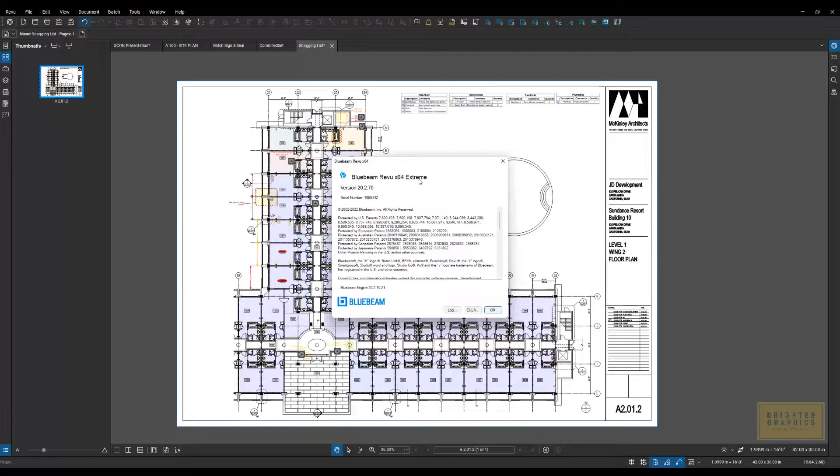So I am running Bluebeam Revu Extreme. You can check on your computer which version you have. It could also say Standard or CAD. Again, these tools that I'm showing you today are only available in the Extreme version.

So I'm going to close out of here, and let's dive into some of these tools and see how quickly I could show you some of them. We're going to walk through a few of them. I'm going to show you the windows and others with the settings and things like that and just talk you through some of those. So let's get moving.

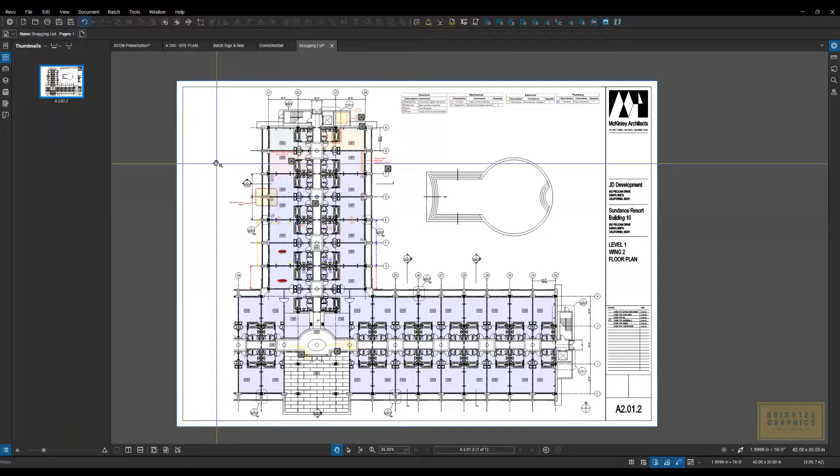First off, I'm going to jump over to a document from XCon. Last week, I taught two courses at Bluebeam's global conference, the Extreme Conference in San Diego. This is my PowerPoint that I had for that course, so I printed it, and you'll notice when I flip through these pages that when you print from PowerPoint, it ends up having some extra padding on the top and bottom of your slides.

So the first tool I want to show you under Batch is our crop and page setup. You click on that, this window is going to open, and I'm just going to have this document here. You can also load as many drawings as you want. So if you have several PowerPoints or drawings or whatever the case might be, you can load those in here using Add. You can add files, the open files that you have open, a set folder full of drawings, or a folder with subfolders.

And you're going to see this in all of our tools today. Just know that you can navigate to the documents you want to work with by going under Add and navigating to those however you choose. So I'm going to just select this one document for now, and I'm going to go to Next.

Our crop and page setup window pops up, and you can see here I have a page setup tab where I can adjust where the content of the PDF falls on that paper, scale it up, scale it down, things like that.

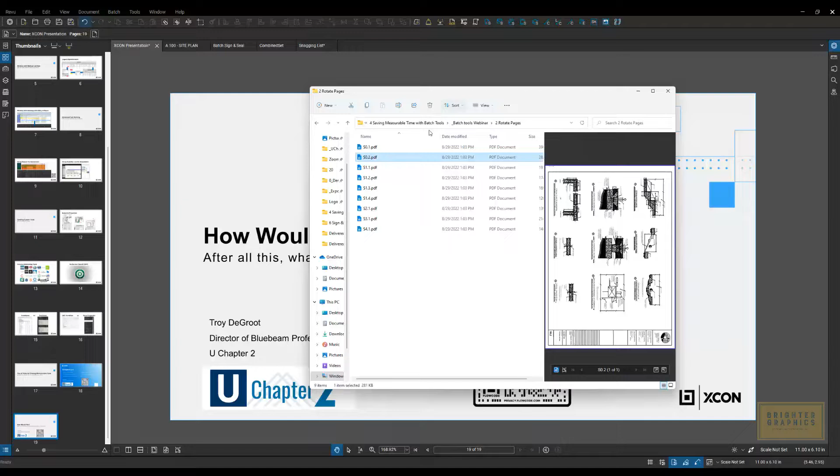So that is our first one. Let's then jump into, I've got a Windows folder open here. Here you can see I have, what do we have here, 8, 10 or so sheets. And it looks like all of these are rotated 90 degrees from whoever printed these. So I'm going to show you how we can rotate those all at the same time rather than opening each one individually and rotating. Again, we're going to go up to batch.

This time we're going to go to rotate pages. I am going to click on this one and remove it. I'm going to go to add, and all of those are in the same folder. So I'm going to select folder, and I'm going to go out to my presentation folder here, and I'm going to go to rotate pages, and all of those documents are in here. It's just telling me that I'm in that folder. So I'm going to say select folder. It's going to bring in each of those documents separately, and then I can tell it to rotate.

This time I'm going to say counterclockwise 90 degrees, and I'm going to say OK. It's going to say you are about to save changes to multiple files. Do you wish to continue? Yes, that's exactly what I was hoping to do. Click OK, and let me bring that window back up. And now you can see inside of that folder, all of those have been rotated and saved without even opening them. So that's the power of some of these batch tools. We can manipulate multiple drawings or documents at the same time without even opening them.

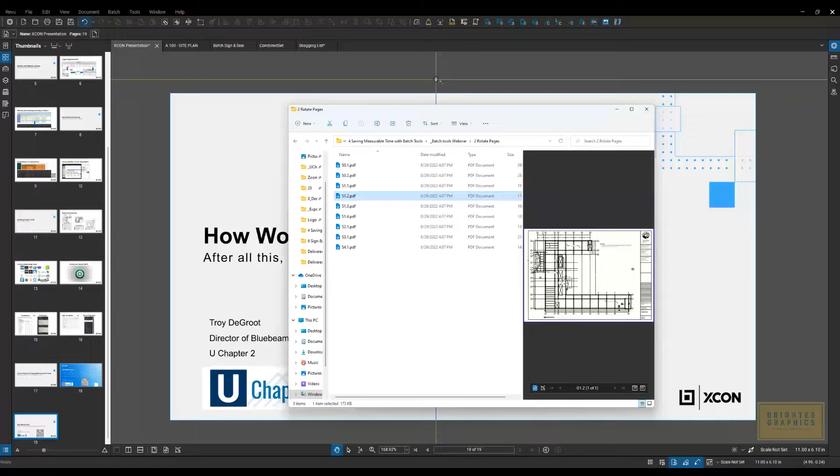Okay, so what's the next one here? Split documents. So if I go to this document, you can see it has close to 40 different pages, and it might be too large to email. We might want to shrink these up or package them in different sections. So the next one I'm going to show you is split docs.

So I'm going to go batch, split documents, and this window will pop up, and I'm just going to introduce some of this to you. Our options down here, we're able to split by page count. So if you want there to be 5 pages in each package, you can do that here. Or if you're concerned about email possibly, and you want to limit the file size, you can come in here and tell it how many megabytes you want per file. And then what it's going to do, you can also make sure that you have the update hyperlinks to relative paths checked so that those hyperlinks to section cuts and things don't get broken.

They still work. Include layers. You can tell it the destination folder in here. And then down here, you can select a prefix or a suffix. So do you want it to say part 1, part 2, and then the document, or do you want it to say that at the end? So the document name part 1, 2, 3, whatever that case might be. Here you can see the pound character indicates the number position.

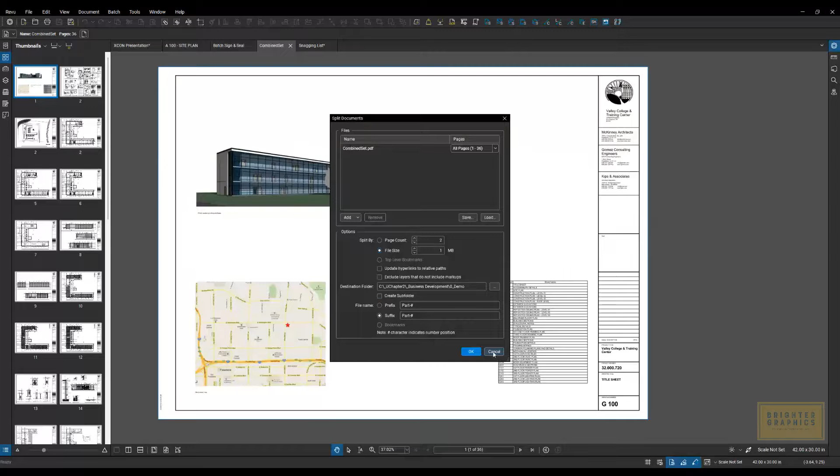Okay, so you can come in here and break up documents into groups or manageable sets to be able to send those apart or send those in an email. So I'm going to cancel that one. The next one, I'm going to jump back and let's jump back to my presentation here.

On this presentation, I don't have any page numbers or anything like that. This could be a bid document, spec, drawing, anything like that where you want to add a header or a footer.

So I'm going to come in here, batch headers and footers. I'm just going to select the file that I have open. Again, the purpose of the batch tools is we could have multiple files open at the same time from different folders all over your network without opening those. I'm just going to point to this one and show you how this works. So I'm going to say next.

And it gives you this header and footer preview screen. On here I could go down, maybe in the header on the left, I want to add the date or page number. So I don't have any page numbers on here, I'm going to add that up here. Page number - I can tell it what format I want to see it in, so I'm going to say 1 of n.

So it'll say 1 of 19, and I want to start at 1. Say OK - that gives me a little preview of what that's going to look like.

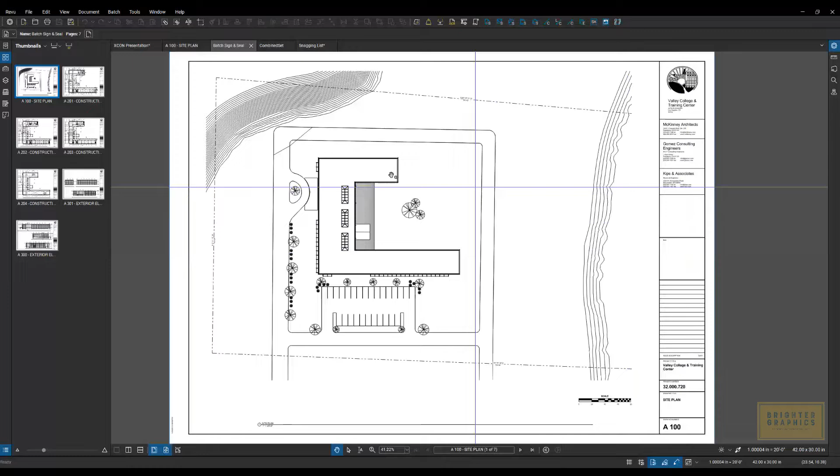So in this case, again, I just have several drawings in the same file. I'm going to come back to my batch sign and seal, and I'm going to select all the pages in here. So on here, I'm going to go in and add my digital signature.

Checking that box, I'm going to go and actually sign in. See if that works. And you can see it brought in my signature here. I'm actually going to leave that on there.

I can put a reason in here - I agree to the terms, I am approving this document, things like that. And then I can also add the date and my seal.

So down here on my seal, I can have it import my signature, or my signature with my seal. I'd have to double check, where I'm just going to use that one. Are you sure you want to overwrite the existing stamp? I'm going to say yes.

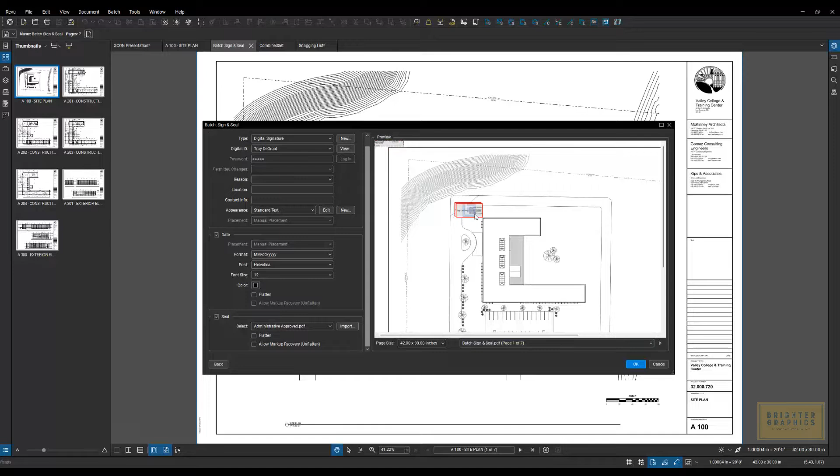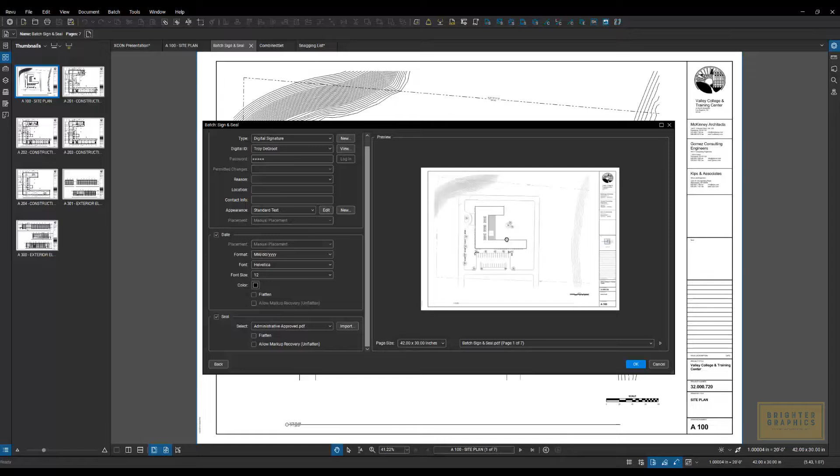And then I can go ahead and move this where I want it. So I'm going to just drag that, drag my date as well, and drag my signature. I'm going to have to zoom in a little bit. And I'm just going to move all my parts over here - sorry, I'm jumping around - put this into that section along with the date. And where did my signature go?

Once I get this all placed in the right place, I'm going to click OK, and it's going to embed that on all of the sheets in this document, all the sheets that my signature's pointed to, and it's going to flatten the document so it's ready to send out certified and signed. So that is our batch sign and seal.

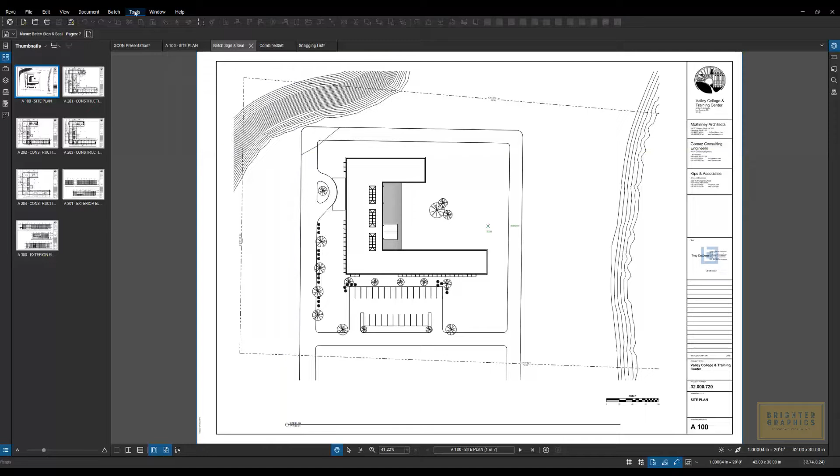Next, looks like I skipped over one. I'm going to jump there quick: batch security. Looking at the settings, we have an opportunity to require a password to open the document. You can put in a password and verify it, and set different security levels on documents, requiring a password to print, copy, or edit, and so on. You can see the different settings in there for security.

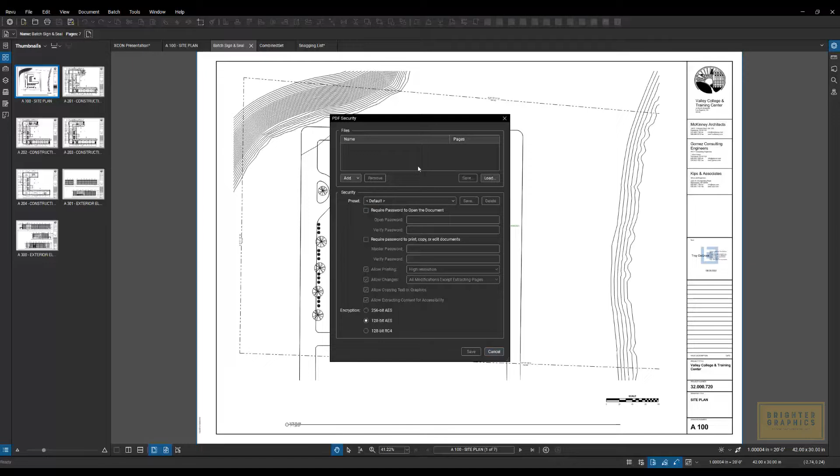In a batch capacity, again, you would load as many drawings as you want at the same time without even opening them. Cancel here, go back, and the next one we were on was apply stamp.

In a lot of scenarios, when you're in a document that has several pages, you can always apply a stamp to several pages. Apply to all pages is a right-click option.

Here, we're able to point to several documents again without opening them, and position and tell it what stamp, where we want that, using the XY coordinates, we can tell it where to put that stamp, where the anchor corner is. So from the upper left corner, this particular one I have set up to go 5.7 inches to the right and 7.5 inches down. This is just a way to apply a stamp, whether it's a preliminary or a not for construction stamp, anything like that, to several documents at the same time.

So I'm going to close that.

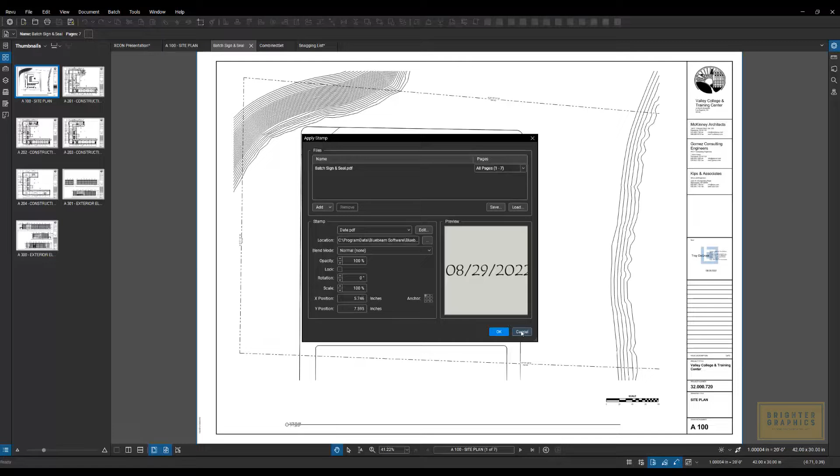And I'm going to jump into the combined set here. Again, this is the same document. We have almost 40 sheets in here. This is one of the most popular features in the batch tools, and it's called batch hyperlink.

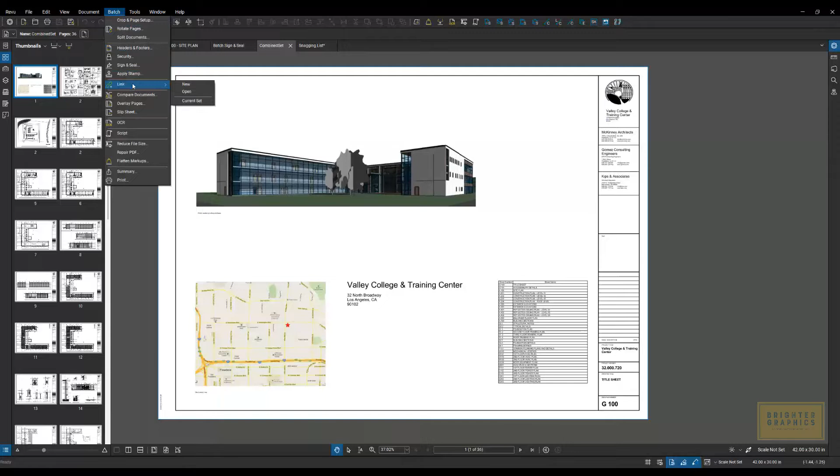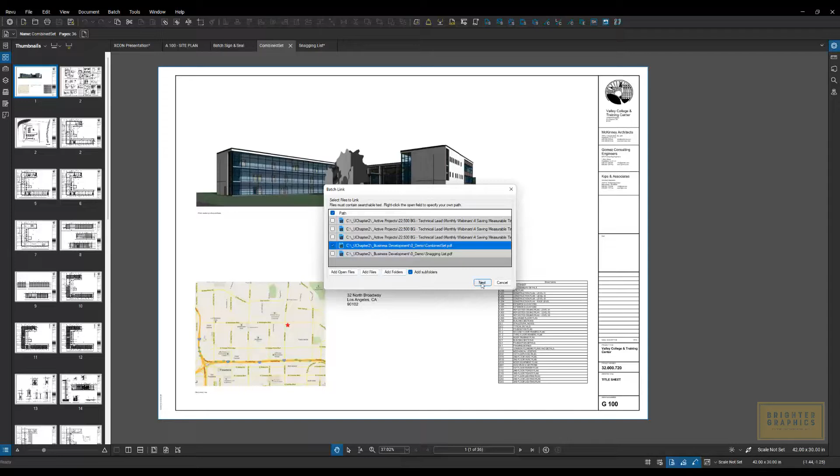So if I come up here again, batch link, I can click on new, and I'm just going to select open files. I don't want that one. This should be the one I want. Actually, it's this one, sorry. Again, you can add files and folders. I'm going to show how to do this within one document. I'm going to say next.

With this one, I am going to select a page region. Click on here, I'm going to go down and draw a box around this G100. And I'm going to say OK. Over here, I'm going to click on generate, and it's going to create this list. So what this list means is that every time Bluebeam finds G101, it's going to create a hyperlink going to page 2.

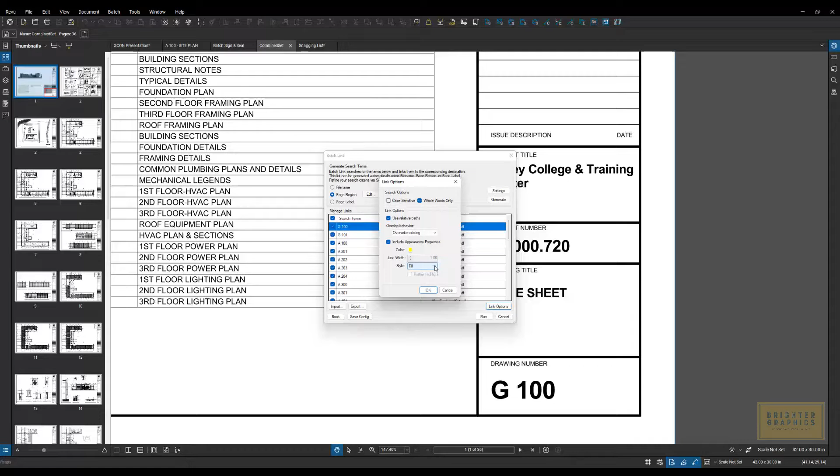So now we can go in and click on run. Let's take a look at the link options first. I like to include the appearance properties and select a yellow fill style, and that will make sure I can see all of the hyperlinks because they'll be highlighted yellow. I'm going to say OK here, click run, and you can see what that looks like. It's going to go through in just a couple seconds. It's looking for all of those sheet names in all of those sheets, and it's created 129 hyperlinks that quick.

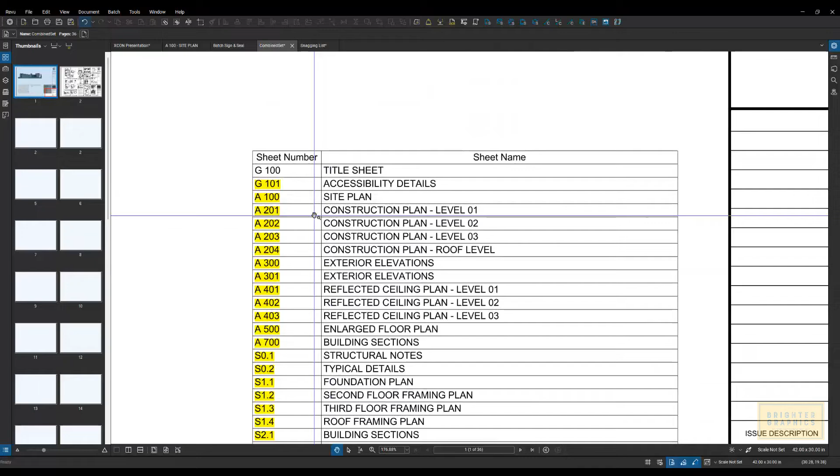I'm going to click on finish and close, and now you can see my sheet index is active, and I can go look at level 1. I can click on the stair blow up, I can look at the stair section. It's just a really nice way of navigating through those drawings, drilling down from the plans through the elevations, building sections, and details.

So that is our batch hyperlink.

Next one I'm going to run through is batch compare documents. In here, I want to select the current file, so I'm going to grab onto a folder and go into my compare documents. I just called this one current drawing, that's where all the current drawings are, the full set. I'm going to say select.

And then on this one, the revised files, I am going to point to a folder here, same project, going to select revision 2. And it pulls in those drawings that were affected here.

Now I'm going to click on Match Pages. It's going to recognize how these are named and match those up for me. And then all the unmatched are ones that don't have a revision file. So this worked just the way we wanted to. It found the ones that matched and lined them up together.

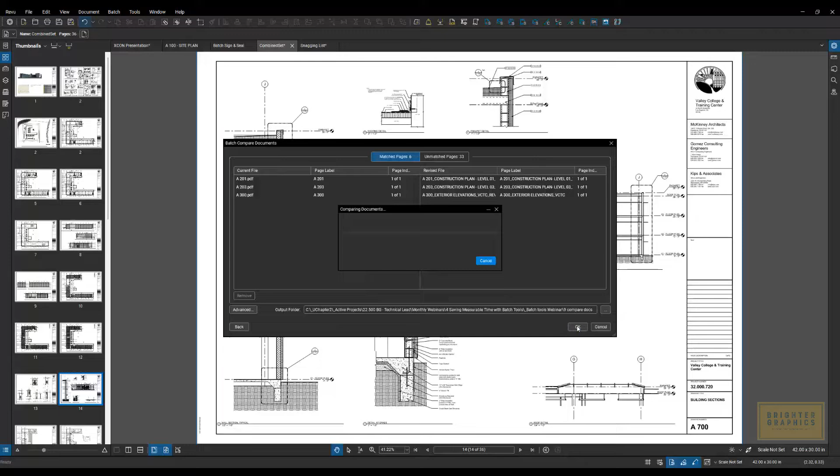So it ran those. I'm going to just say OK here. I don't need to do that report. And let's go back to our folder and open that up.

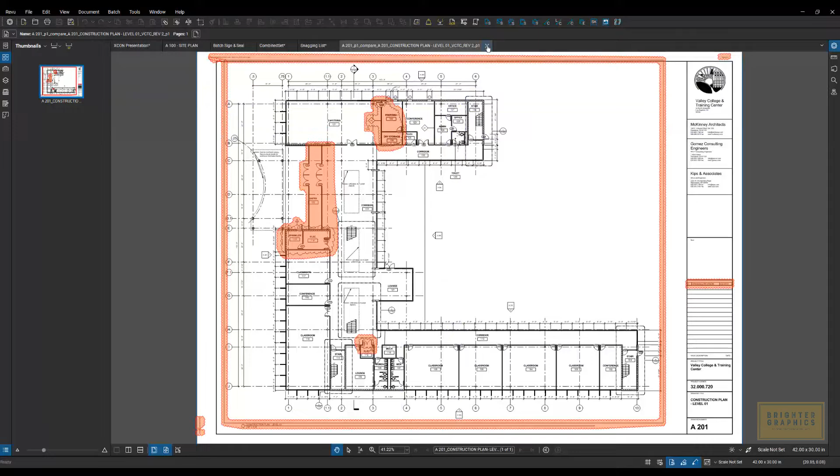Into our compare documents. Here you can see in the preview, I'll open up one of these. It ran it on each of those. Here you can see it put a cloud around all the areas that were different between the two drawings. So if we opened those up, the original and the revised, you would see that this wall moved over, they rearranged this room here and added this one. So it's finding the differences in those drawings in a batch capacity and clouding those for us. Really cool tool there.

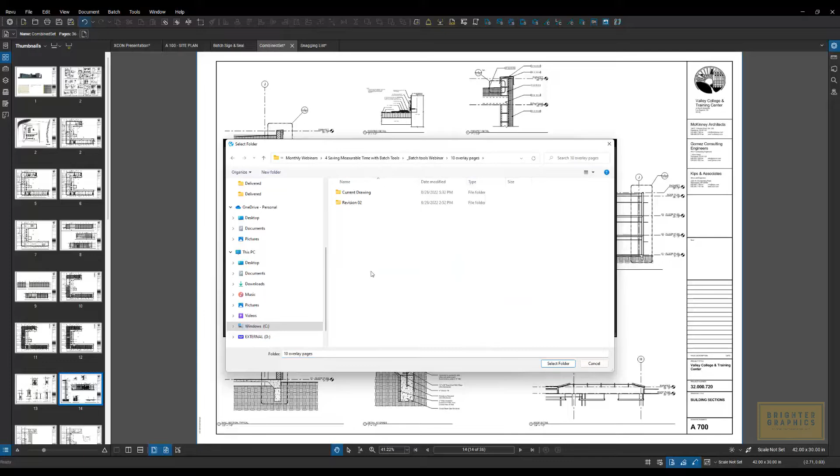The next one we'll show is our batch overlay. If you're not familiar with the overlay, let's just do the same folders real quick. The original's up there, and the revision 2. Match those again. They found each other and made sure that they matched up. This time I'm going to go to my overlay pages folder and say OK. And that's going to run.

It's going to ask me if I want to put a report in there again. Just for documenting purposes, when revisions come through, it might be a good idea to run a detailed report and put that in that comparison folder. I'm just going to cancel that.

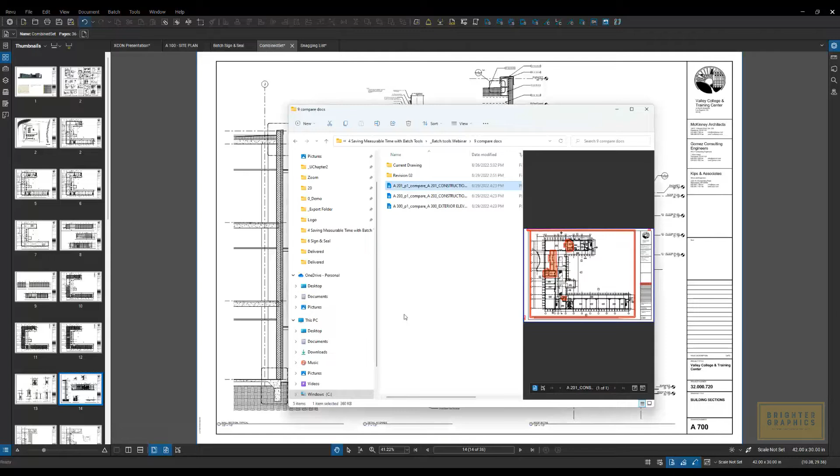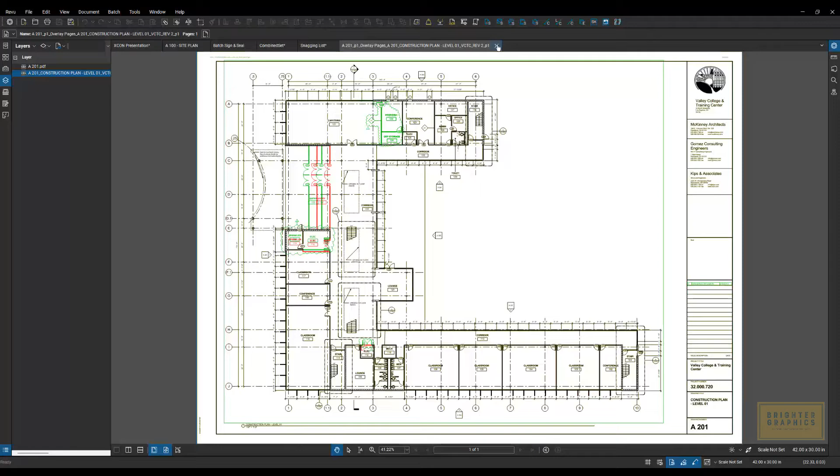Jump out to my folder again, to my overlay pages. And here I'm just going to open up one of them, and you can see what's different between those drawings. So it puts those on top of each other, just like an old light table, shows you the differences. If you go to the Layers tab, you can turn each version on and off, so you can see what's on this one and what's on that one, and how they correlate with each other, overlaid on top of each other. That is our batch overlay pages.

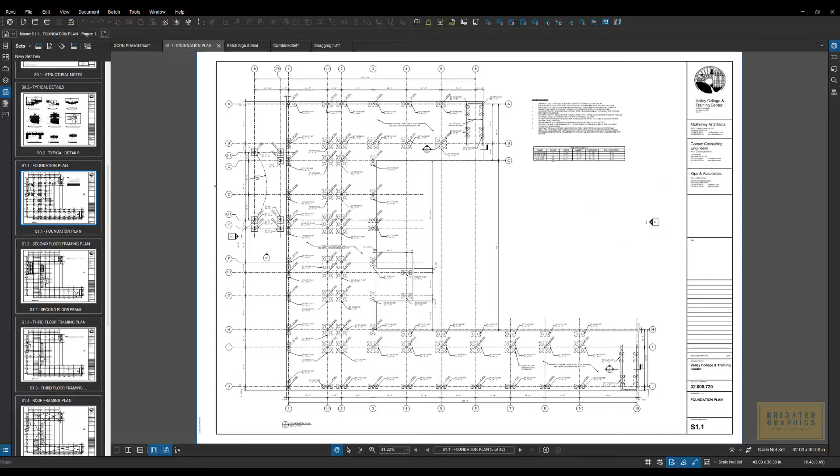Next, we're going to go into Slipsheet. This one's another popular one. If I go into my sets, you can see that I have built a set of individual documents. These are all individual pages, pulling from a folder so that we're looking at a set. When I click on these, it'll open up an individual sheet and allow me to not have the document that's 40 pages open, but only one at a time. So it opens it up so other people can work on this as well. In this one, you can see this is all my current set.

And with Slipsheet, we can actually start stacking in our revisions. So I'm going to come in here to Batch Slipsheet. My open set is my current drawings, and my revised file, I'm going to come out and point to the folder, Slipsheet Revision 2, select. It's going to bring in all of the sheets that were affected by that revision, and I'm going to click on Match Pages again.

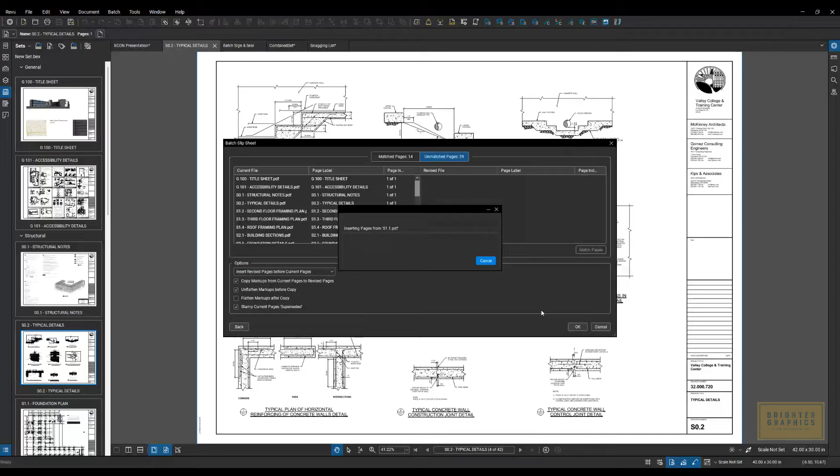So I'm going to click OK here, and you're going to see those slide in. And the new one is always going to be on top. I can create a report on this also. Click OK there. But you can see here on this structural S.1 sheet, you have the current sheet and you have the superseded sheet. So you can always go back and look at previous versions, but your most current one is always going to be on top.

So that is our slip sheet. And then as far as user functionality goes, all your users would open up this set file and have access to this set instead of opening up the individual drawings. That way everybody's looking at the most current set at the same time.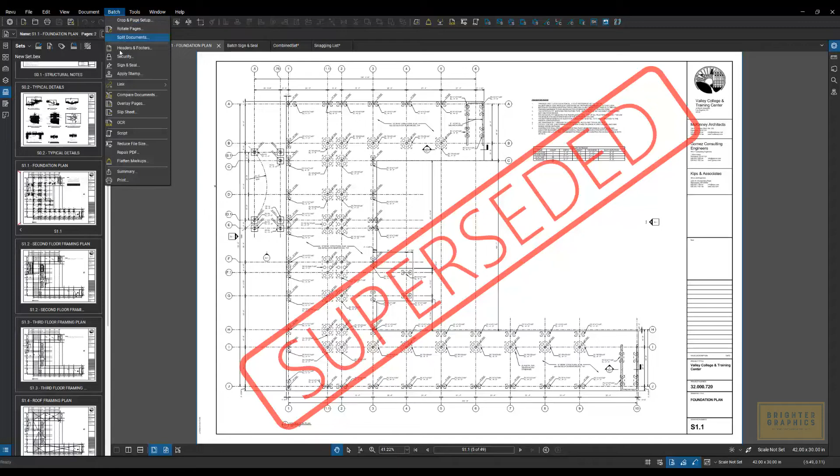Next one is OCR. I've got to speed up a little bit with our time constraints. When you come in here, it's going to allow you to select your drawings, folders full of drawings, whatever the case might be.

Set the language, set what type of drawing or document it is - is it text, CAD, whatever the case might be. Do you want to correct the skew? Is the drawing scanned and turned slightly on the sheet? You can fix that. Detect orientation, detect text and pictures, and so on. You can also skip vector pages because those are already optimized. Click OK, and it's going to run through and fix a lot of these issues we have with raster-based drawings.

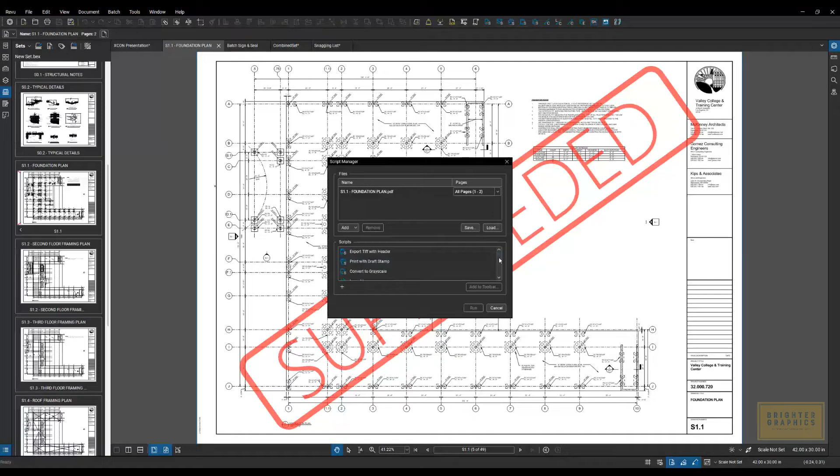Cancel that. Next one we go to is script. I discussed this a little bit earlier, but you can build scripts in here. This one's kind of cool - it's 4 different steps built into a tool. If I select this and go to edit, it'll help you build these scripts with color processing.

So I'm changing everything to black, I'm going to stamp it with this stamp and this is where I want it to sit, I want to flatten, and I want to split pages. It's going to do all of that with one button, running through all of those scripts. So lots of time savings there as well.

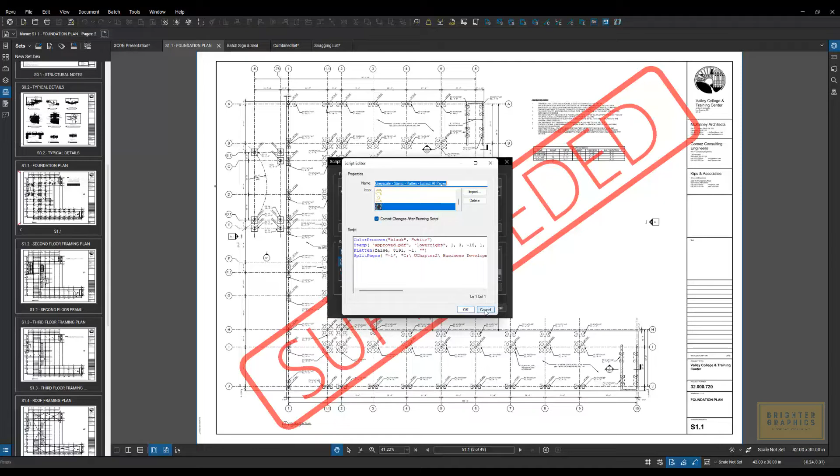Cancel that. I'm going to jump in here and show you reduce file size. This is another one where you can look at the different settings. Load as many documents as you want. You can set the quality dial as high or low as you want.

But what I want to show you here is the edit custom presets. When I come in here, it'll allow us to pinpoint what we're looking to reduce or where we're allowing things to be reduced. So here we've got images, we can go through and change settings there. If we go to fonts, we can look at things there. Miscellaneous - if you're not worried about some of the metadata, uncheck that or check it so that it purges some of that information, and so on. So you can pinpoint exactly what you're okay with reducing or getting rid of so your file size changes.

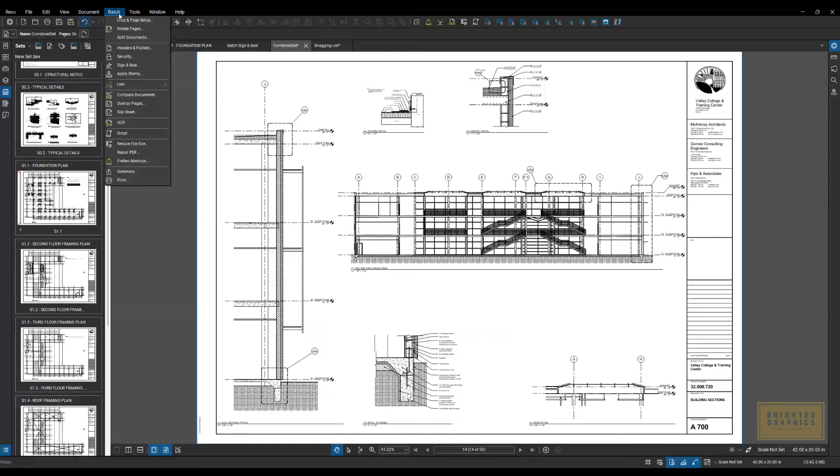Close that one. Let's see, repair. Next one is repair PDF. Again, different things you can select in here, loading all your drawings, remove text clipping, repair fonts, all of these processing wipeouts - that's a big one coming from AutoCAD. Things like that, we want to be able to fix those. So this is where you would repair your PDFs.

Next we're going to jump down to flatten. We're getting there, running out of time. Under the flatten markups window, here you can see all the different things you can pick and choose what you want to flatten - doesn't have to be everything. The things I want to point out here in this window is you can exclude filtered markups, only do currently selected markups, things like that.

But the one to be careful of here is allow markup recovery, or unflatten. You can check this box and be able to unflatten things, make adjustments, and flatten them again. Just be aware that if the user on the other end you're sending this to is aware of this checkbox, they might be able to unflatten them as well. So a lot of people flatten things so people can't manipulate them - just know if they know about this check mark, they might be able to go in and unflatten your markups.

Okay, this one's kind of cool too. If you show properties in pop-ups, you can actually flatten things and still have the subject, the author, and the date pop up when you hover over those markups, even though they're flattened. So this is kind of a neat way of having the metadata in your markup without leaving the entire markup available to be manipulated - just show them the metadata as they hover over that information.

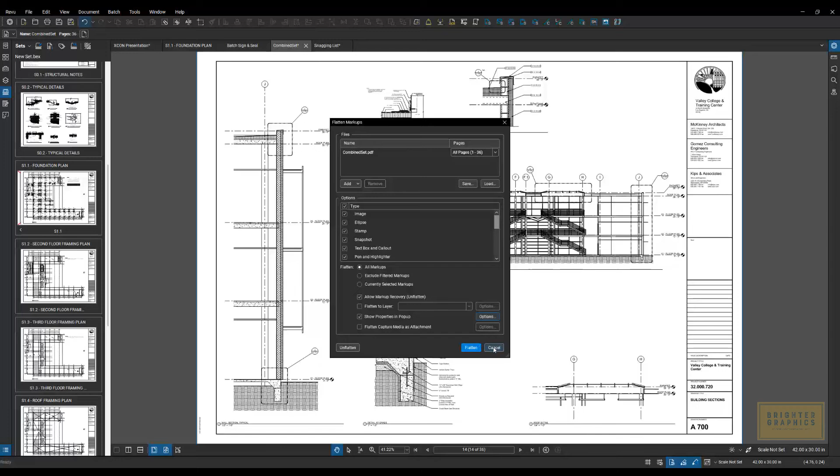Next, I'm going to jump into my snagging list drawing example and show you the markups list. Here are all the markups that I have for all the different disciplines, structural, electrical, mechanical, that I found walking through and placing symbols, things that I found that were wrong or needed to be fixed.

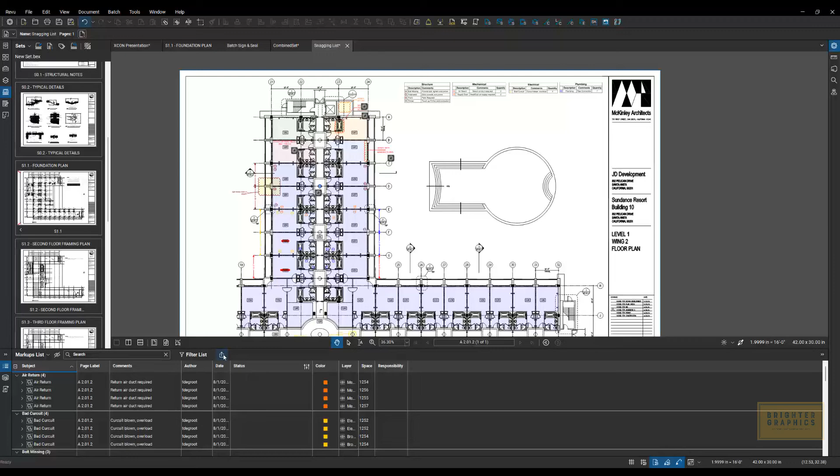And then you can, of course, create a summary up here. Do a PDF summary, and in here you can select what data you want included in that summary. You can filter and sort. So maybe I want to only show the mechanical. Down here, since I added layers to everything, I might select only mechanical, so only the mechanical markups will show up in my summary.

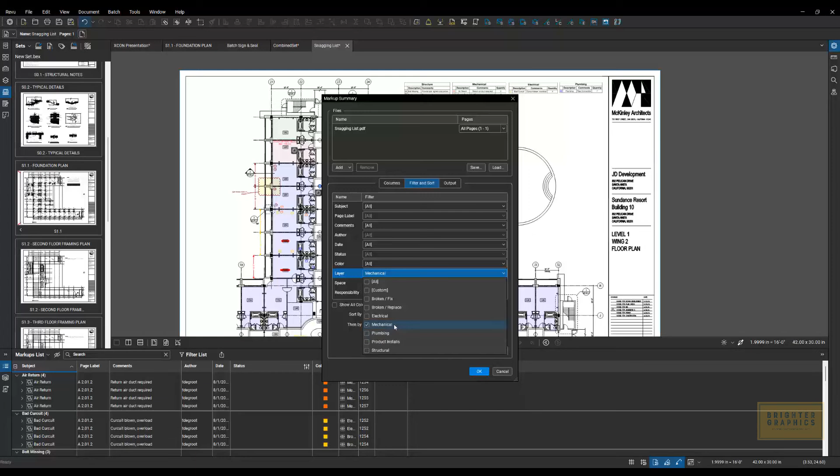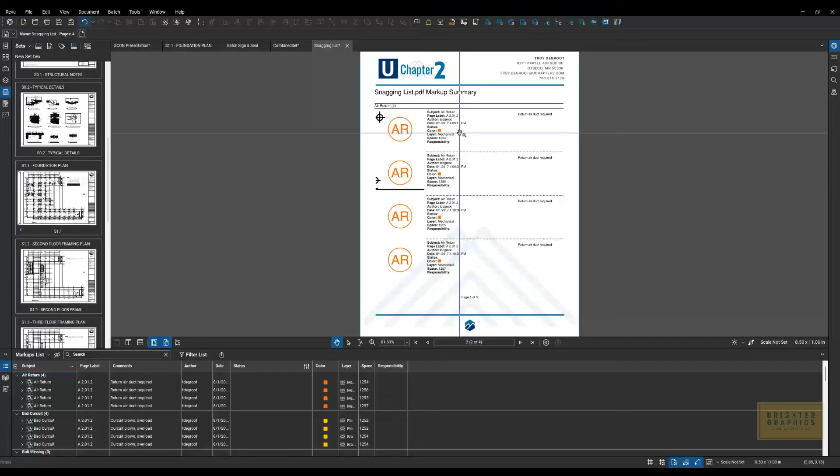And then when I go to the output, I can tell it to go to my letterhead as well. I'll go in here and just say OK and show you what that summary looks like. It's going to show a preview of all the different markups and all of the data associated with that markup, and it all landed on my letterhead.

So there you can see the different summaries. And if we go under our batch summary, you'll see it's all the same setup and functionality here, except we can point to several documents at the same time. So if you have a whole folder full of markups and you want to run a report so you can send it to your drafting team, indicating who's in charge of what, revisions and things like that, you can do that here, just loading up all those drawings.

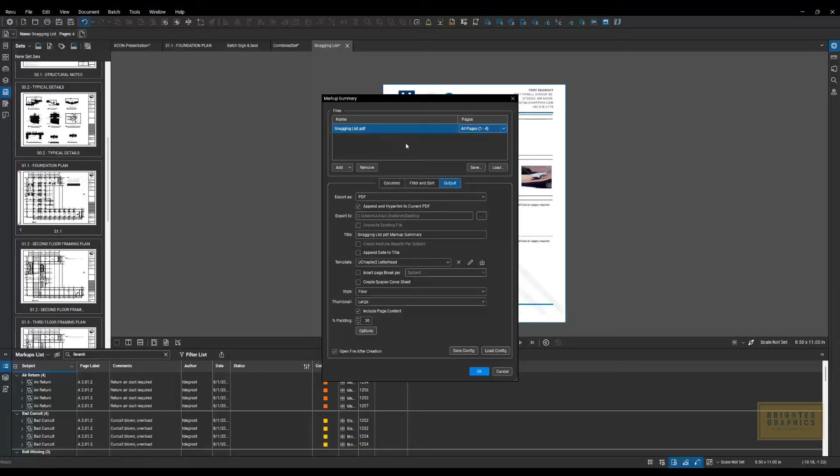I'm going to cancel this one, and then we'll jump into the last one, which is batch print. Very similar to the summary, you can go in and load several documents, whatever those might be, different projects, different phases, all in different folders. You can load all of those just like the other tools, and then come in here. Maybe you just want to combine them all into one PDF. You can select your Bluebeam PDF, print it to a new PDF, or select whatever printer you might have in your office if you're printing to a paper document. So that is our batch print.

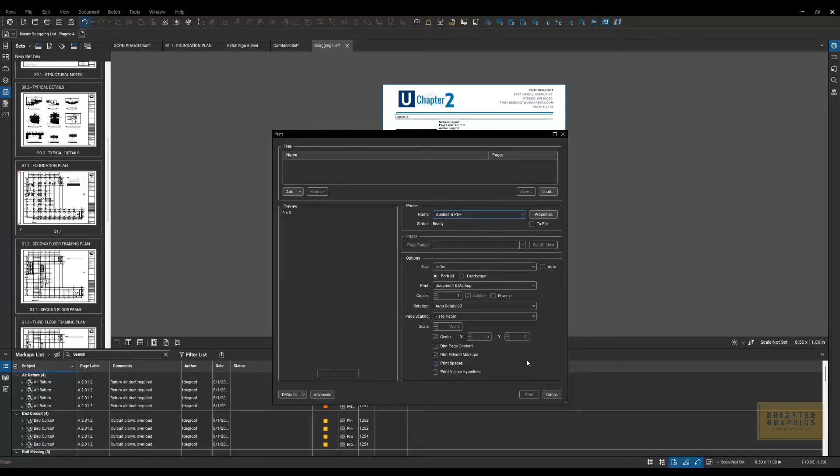Well, there you have it. How's that for tools that save you time on tedious tasks? That was another fun presentation again this month. I hope you all took notes and enjoyed the detailed introduction to Revu's batch tools.

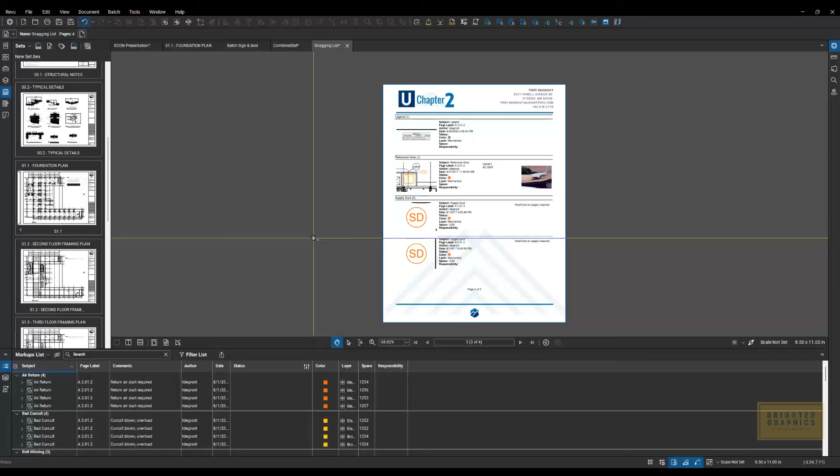Thanks for hanging out this afternoon. It looks like everyone hung in until the end again. Darren, I saw the team answering several questions along the way. Are there any more questions or things you'd like to add before we sign off?